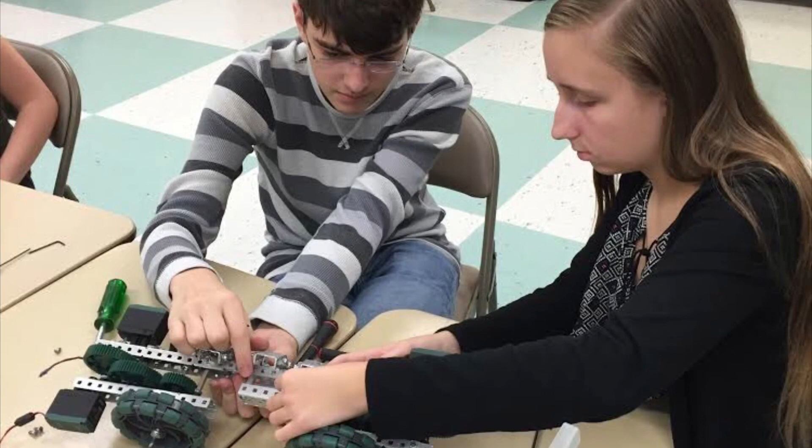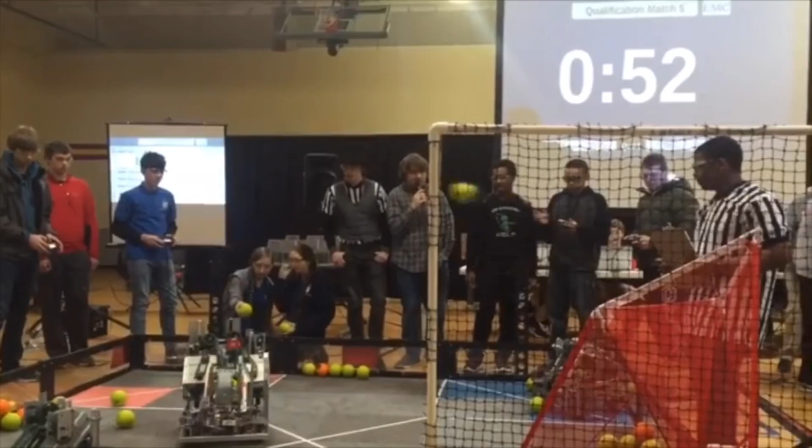The team consisted of 2 seniors and myself. As a freshman, I was a grunt worker, assisting the seniors mainly with building. I gained valuable programming knowledge, good building techniques, and team management skills from the seniors. Since they were graduating, they taught me important aspects of leading a team. We competed in the Maryland State Championship, made it to the tournament finals, and even won the Design Award, all of which qualified us for the World Championship.

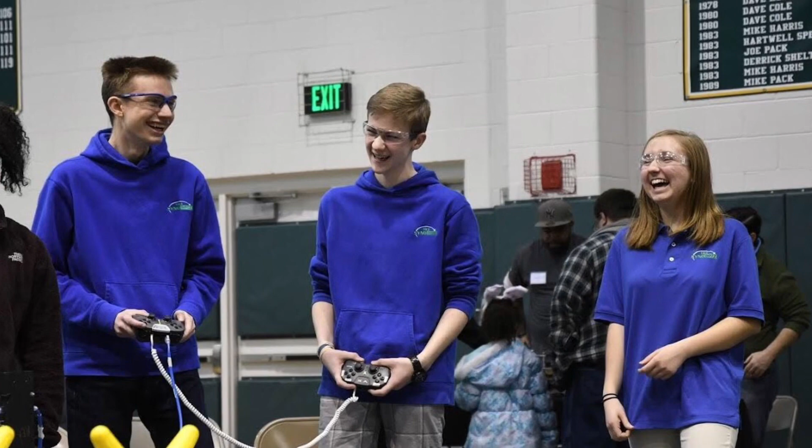Since my team consisted of seniors, a new VEX season meant a new VEX team. This is where I met Team Cinobots. The team consisted of 3 boys, a sophomore, freshman, and 8th grader. Despite being the only girl on the team, I was determined to stick with my passion. I quickly became a key player on the team. During competitions, I was the coach on the field.

As the main programmer, I would program all the remote controls, autonomous functions, and programming skills runs. In between programming and competing, I would CAD modifications to the robot design. To boost our team's overall performance, I took the lead on documenting all our progress in the engineering notebook. Throughout the season, we participated in multiple local competitions, which qualified us for the state championship. With great alliance partners at the Maryland State competition, our team made it to the semifinals and qualified for the VEX World Championship.

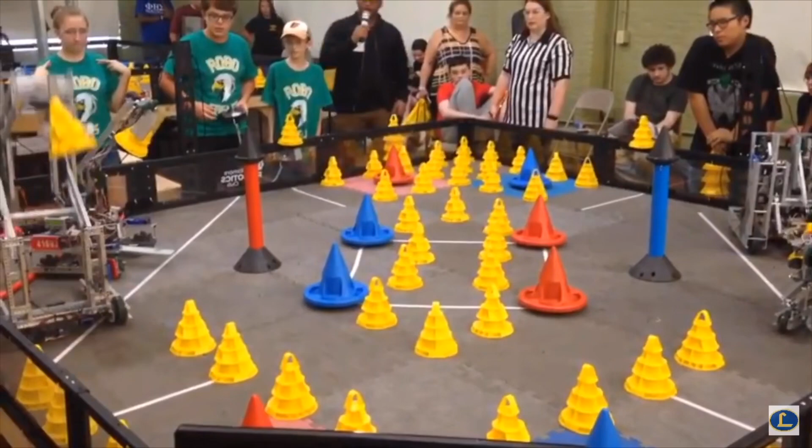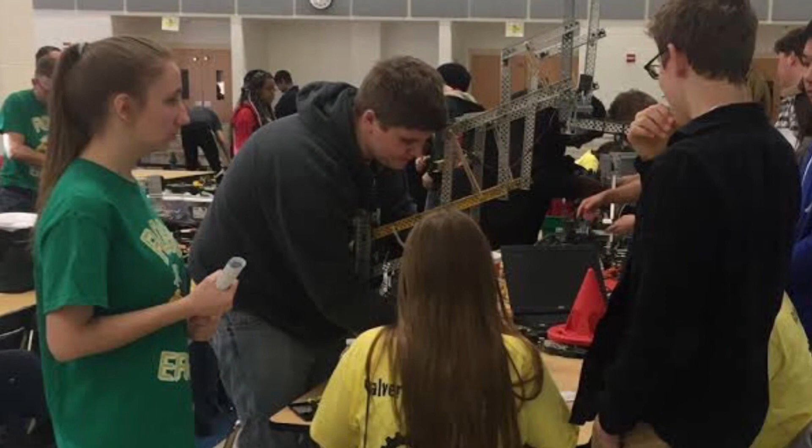Last year, I was invited to help start a middle school robotics team at St. John's School. After much thought, I decided to switch to Team 4169J, the Robo Eagles. This team consisted of 3 middle school boys. Since I was a high school student, the team had to compete in the high school division, regardless of the age of my team members. Although it was not an ideal team for me, I still took on the challenge of working with middle school students. It gave me the opportunity to truly be the leader on the team.

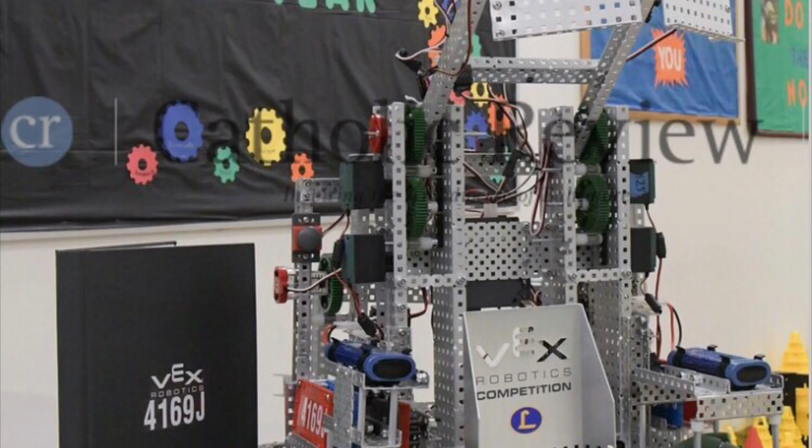Through hard work and determination, my team had a very successful season. We started the year off strong by winning tournament finalists and the design award at our first competition. As the year moved forward, we continued to set goals and did not settle for anything less. We won tournament finalists again and the Excellence Award twice throughout the season. These awards qualified our team for the Maryland State Championship. Even though we did not win any awards at the state championship, we did qualify for VEX Worlds through our skill score. We were so lucky and excited to be one of the 12 teams to represent Maryland at the World Championship.

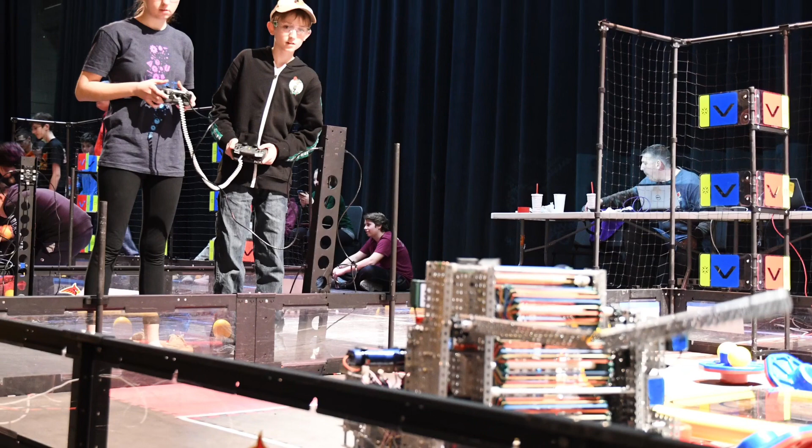For my last year participating in VEX, I stayed on Team 4169J. Our other team members had moved on from VEX, so the team was down to 2 members. It shifted into a brother-sister dynamic duo. Despite the team member changes, my role on the team mainly stayed the same. I remained the lead programmer and CAD designer, but this year I also became the robot driver for the team during competitions and skills events. For the past 3 years, I have always been the driver coach, but this year I decided to truly take on the role on the field.

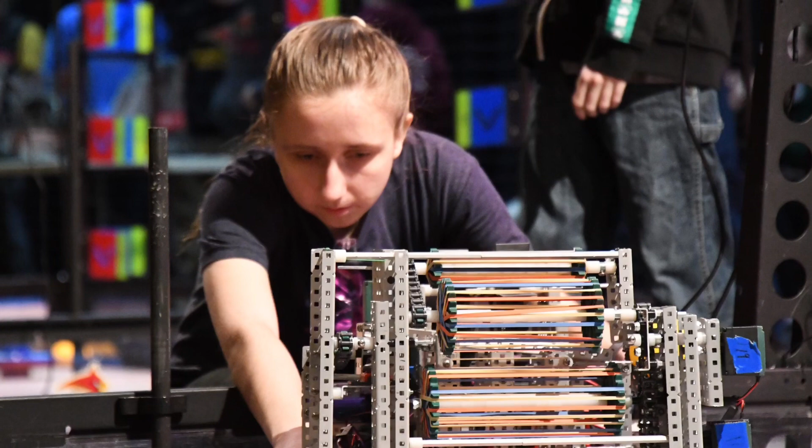With the obligations of senior year and robotics, I knew this year was going to be busy and took the season head on. The challenge for the 2018-19 season was called Turning Point. There are 2 alliances during a match, each alliance with 2 robots on the field. The object of the game is to attain a higher score than the opposing alliance by scoring caps, flags, and parking on the platforms. If a cap is flipped to the team's color, then 1 point is awarded to them. If the caps are stacked on the poles, then an extra point is given.

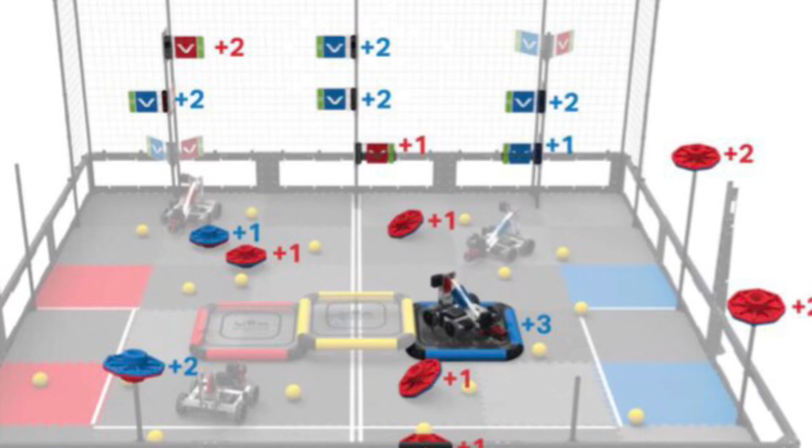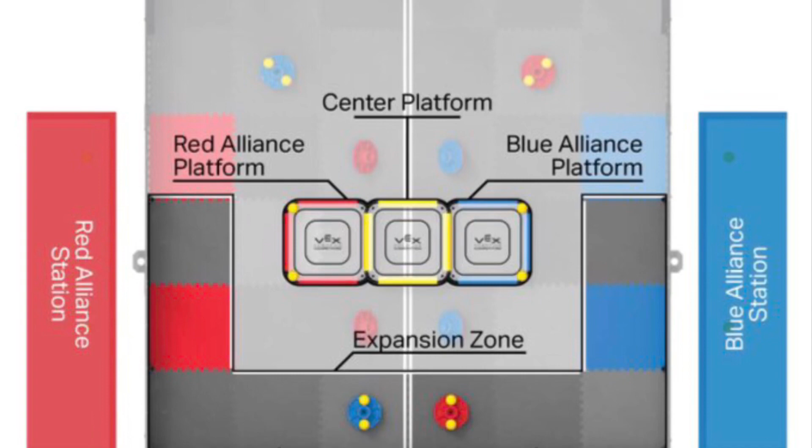The low flags are all worth 1 point, while the middle and high flags are all worth 2 points and can only be scored by shooting the balls on the field. This is because robots are only allowed to expand vertically when they are within the expansion zone. At the end of each match, if a robot is parked on the alliance platform, 3 points are awarded to the alliance. An extra 6 points can be awarded to the alliance that parks on the center platform.

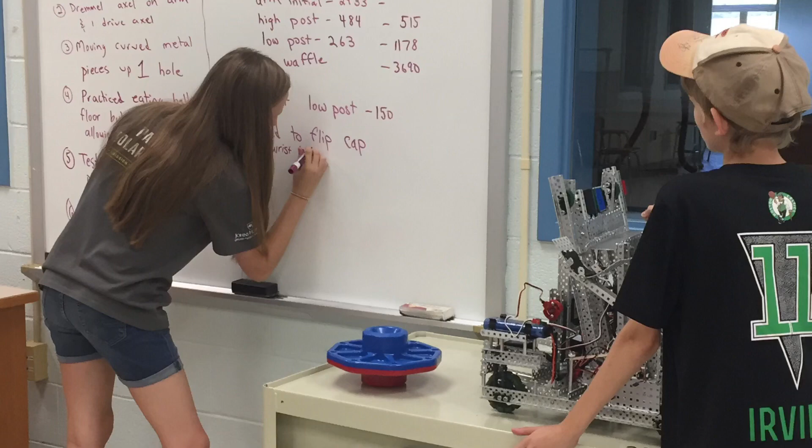When we started the year, we made a list of goals that we wanted to accomplish this season. The goals we decided on for the VEX season were to create a reliable robot that can complete all the tasks on the field, always keep updated on changes, make enough drive practice time before competitions, and try our best and have fun. To accomplish these goals, we started brainstorming different designs for the robot.

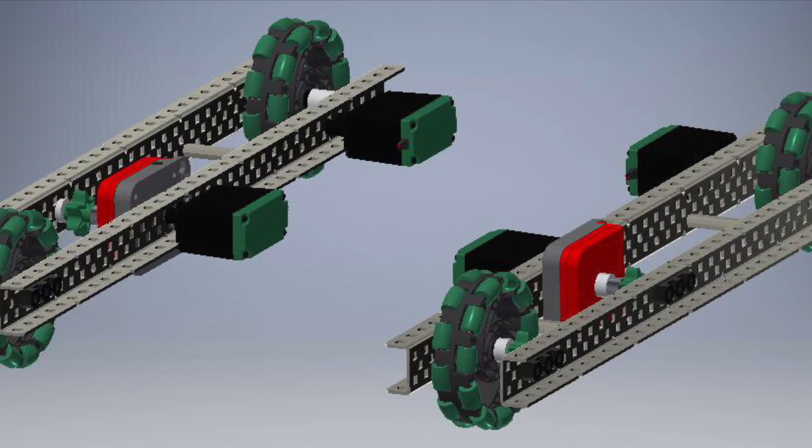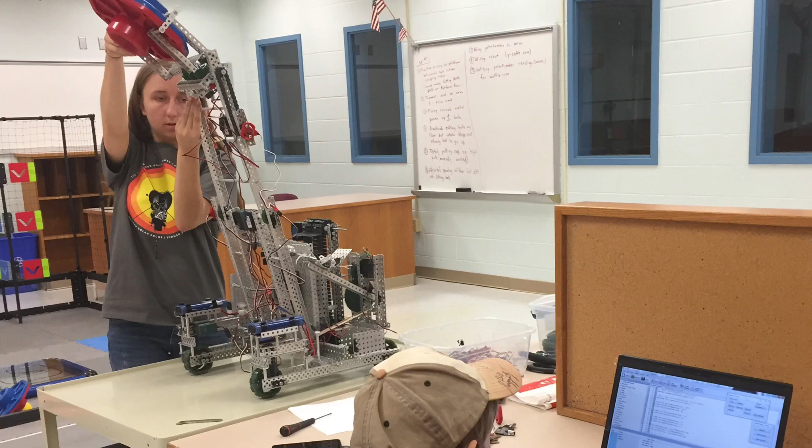We thought of different drives, cap flippers, and shooting mechanisms. We listed out the pros and cons of each design and ended up deciding on a design with a standard drive with Omni wheels, a 2-bar lift with a waffle-like intake, and catapult. We decided on this design to keep the robot simple and not overly complicated. The robot would be able to complete all the tasks on the field and be a strong alliance partner during competitions.

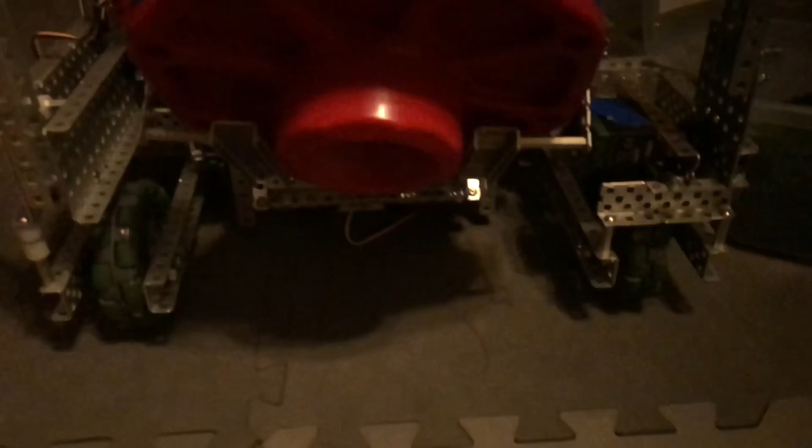Although the 2-bar lift worked for flipping caps, it was often unreliable in scoring caps consistently and effectively. The robot had trouble climbing up the platform during matches. The 2-bar lift also had trouble scoring the caps on the poles, so we decided to do a major redesign.

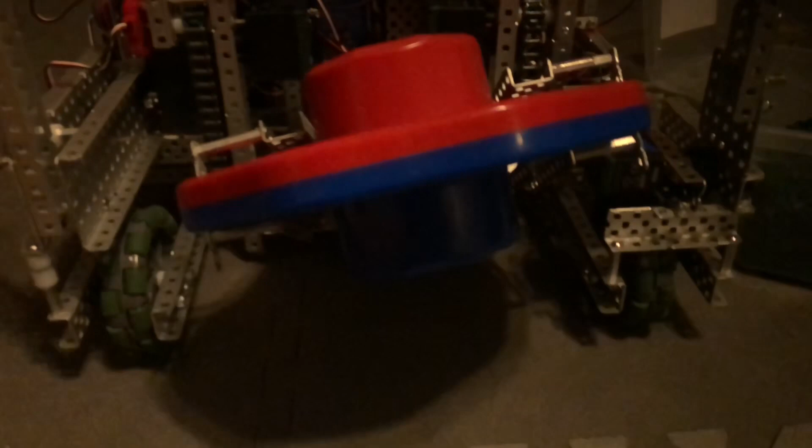We added a reverse 4-bar lift to the robot that would attach to the waffle intake. We chose this design because it could reach really high up to stack on the poles, and it was more consistent in scoring the caps on the field. In the open space in the middle of the lift, we added a more condensed version of the rubber band

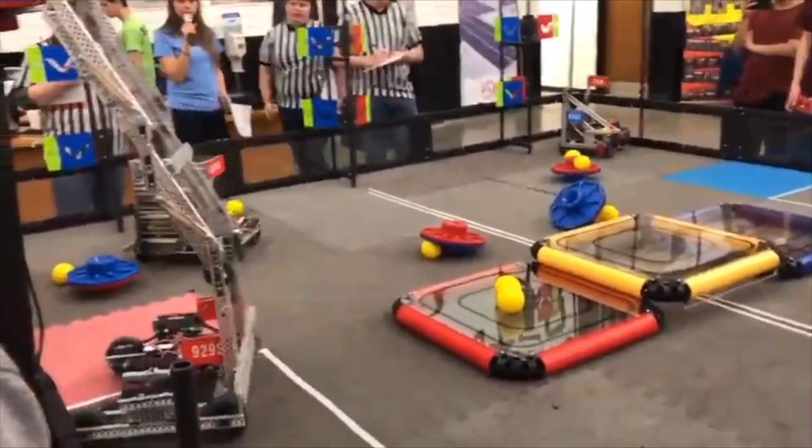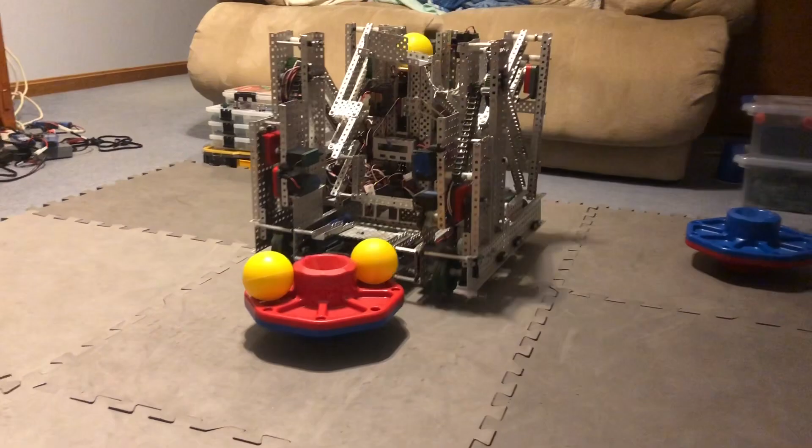intake and catapult. This design worked great in competitions, but we often found that it was a waste of time to try and stack the caps on the poles when other teams could just knock them off in a matter of seconds. Since the lift made our robot very big and bulky, we had a major redesign time. We took off the reverse 4-bar lift and completely scrapped the waffle intake.

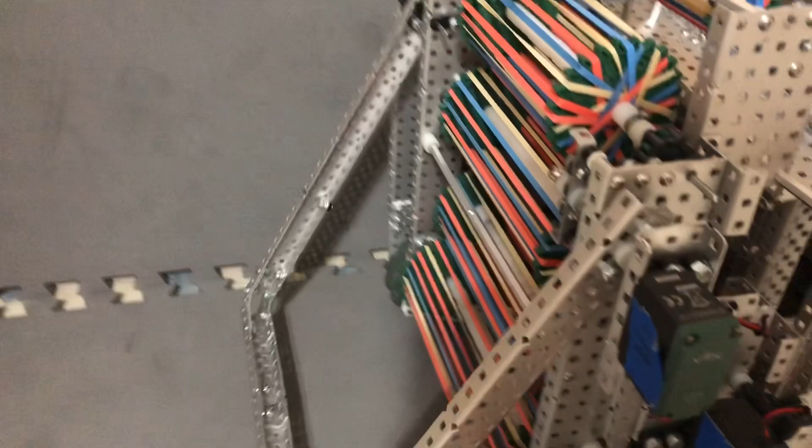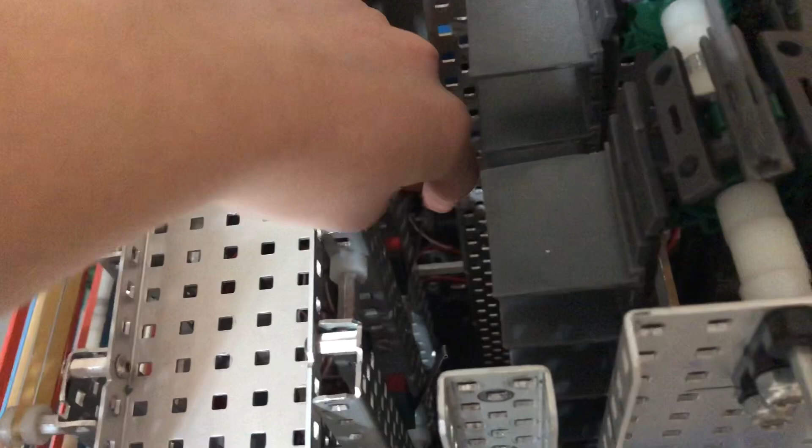We added 2 rubber band intakes with a passive cap arm flipper on one side. Having 2 rubber band intakes did not limit us to only intaking balls from one side of the robot. Inside each intake, there are 2 limit switches. When these limit switches were touched, the count for the number of balls captured would increase and count how many balls were in the robot at a time.

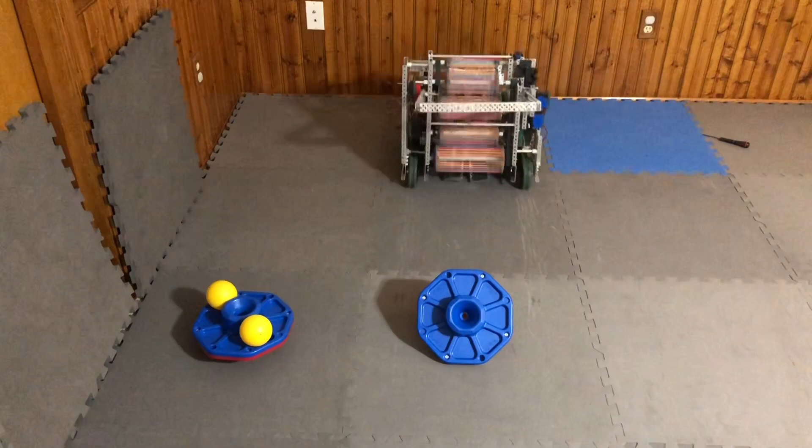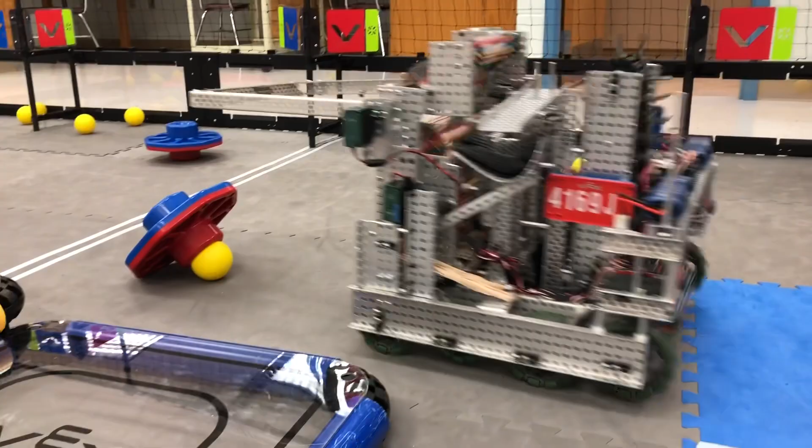This was really helpful and innovative for our team because once the count reaches 2 balls, the intakes would shut off and we would not be able to grab any more balls off the field. When the catapult would shoot, the count would decrease by 1 and the intakes would run again. We kept our catapult design and gave it more space so that it could accurately throw the balls across the field.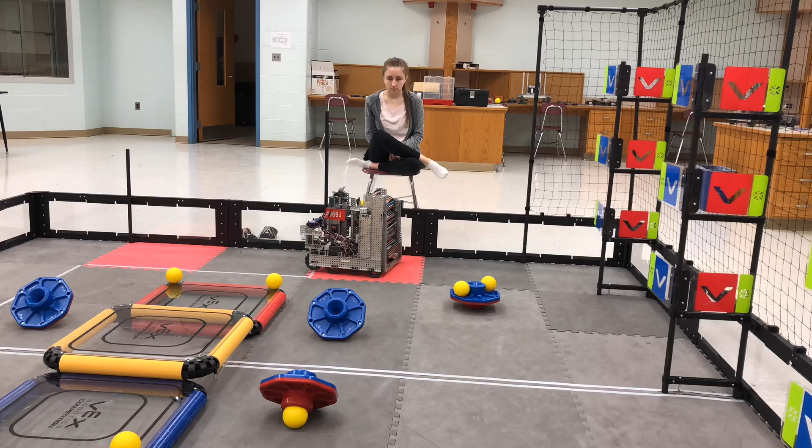This drive design played a crucial role in how we performed on the field during matches. Sticking with this design, we were able to create a reliable robot. We worked on robot and programming skills between competitions to boost our overall performance. As the lead programmer, I wrote many autonomous functions for our matches so that we could score the most amount of points in the allotted time given to us, as well as have the flexibility to work on either side of the field and collaborate with our alliance partners.

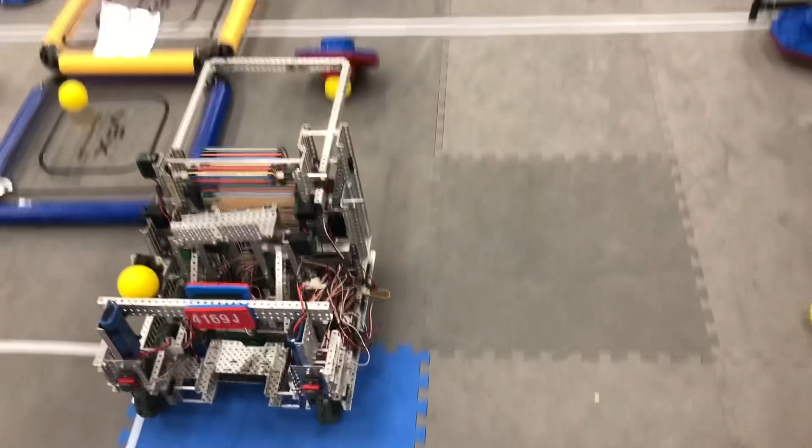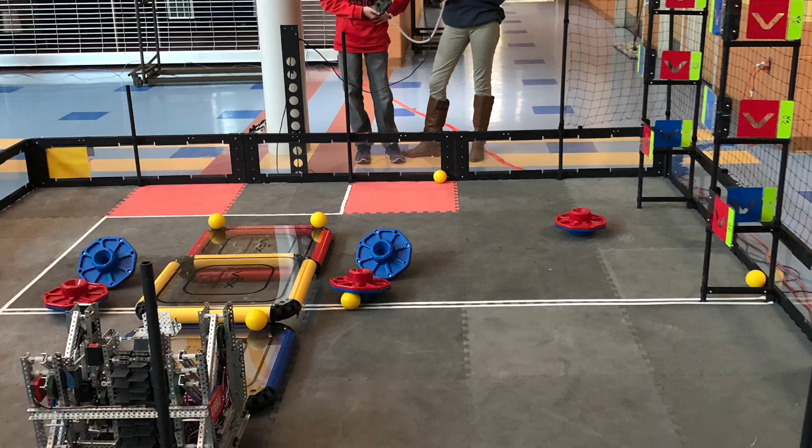This was easy for us to do with the use of an LCD screen that would display all our autonomous functions that we could easily select to use before the start of the match. Throughout the whole year, we participated in many VEX tournaments. Our first award was the Design Award, which qualified us for the Maryland State Championship. In February, we won the Excellence Award, Robot Skills Champion, and Tournament Finalist Award.

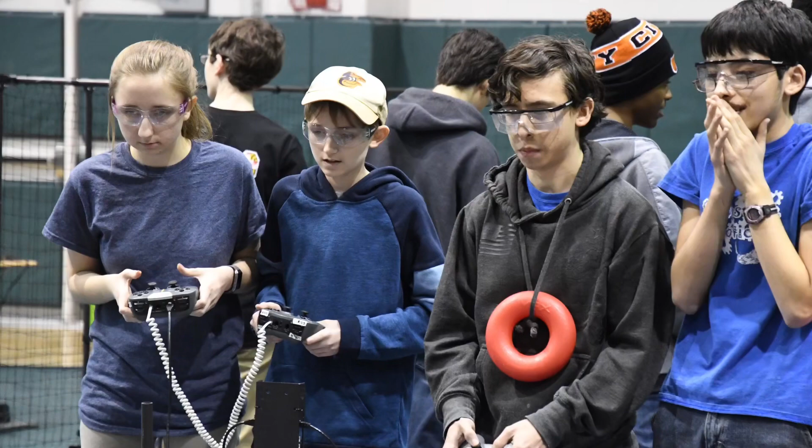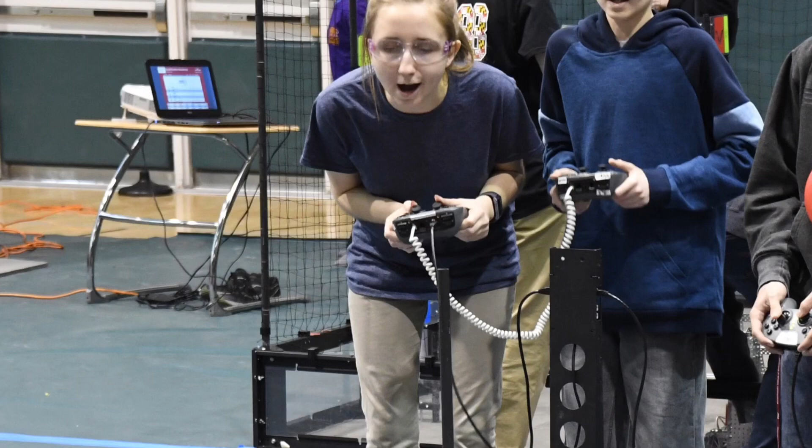These competitions kept us in tune and up to par with the other robots we would be competing with at the state championship. When the state competition came around, we ended up with a tough match schedule and did not qualify for the World Championship. Despite the outcome of our matches, we still had a successful season full of hard work, determination, sweat, tears, and laughs. Receiving awards is nice, but there is much more to VEX than just winning.

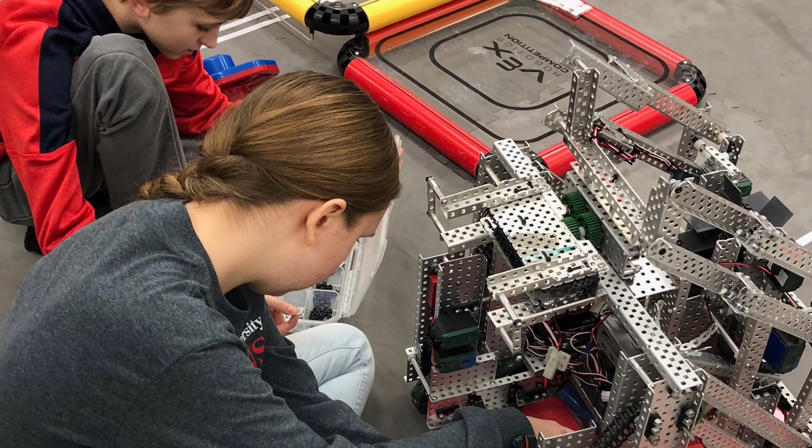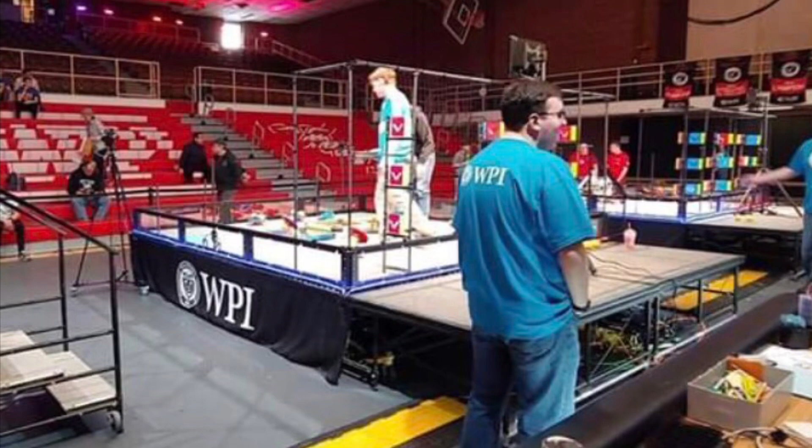VEX Robotics taught me valuable life skills such as becoming a problem solver and innovator, communicating and collaborating with different people, and managing a project over an extended time period. I can use these skills on a robotics team, at WPI as I pursue an engineering degree, and most importantly in any real-world situation. VEX Robotics provided a foundation of knowledge for me to pursue at WPI through future projects.

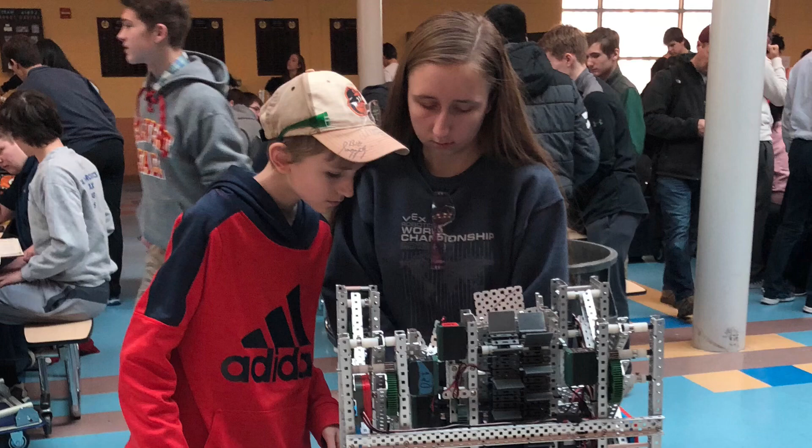I will utilize the resources in Fuller Laboratories or expand my creativity in Foisie Innovation Studio. I can actively explore real-world challenges. Overall, WPI will not only prepare me to become a valuable employee at leading technical companies, but also a person who can give back both locally and globally. I cannot wait to expand upon my robotics knowledge at WPI this fall.